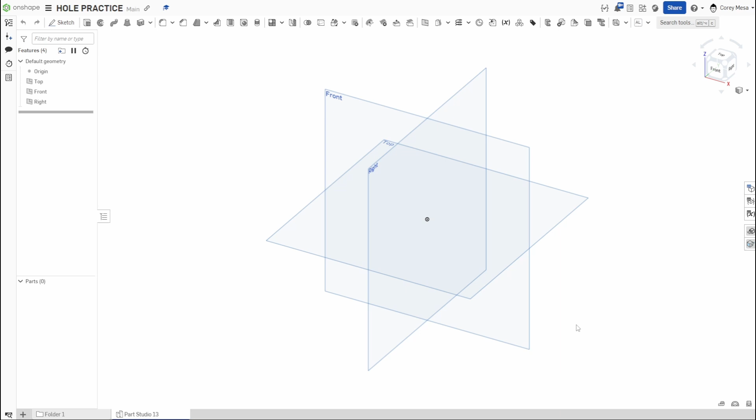Today we're going to be talking about the hole feature in Onshape. So like always, let's get started with a sketch. Let's start on that top plane, Shift S, letter N to normalize, and P to hide those planes. So for what we're going to do today, I'm just going to draw a big rectangle. Let's go like 12 by 6 off that center point on that origin.

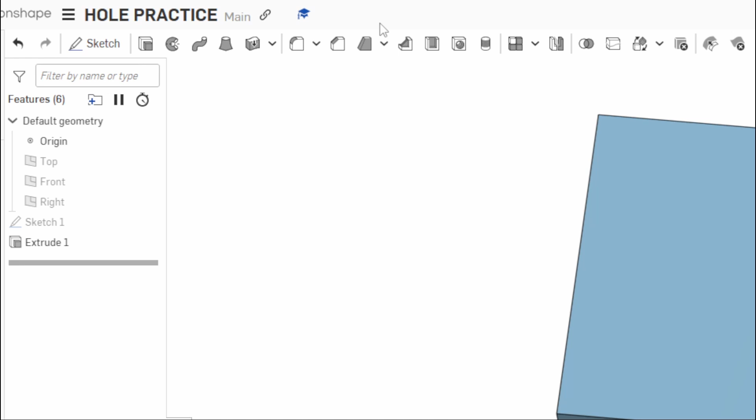Let's do an extrusion by holding Shift and E. And let's make that 4 inches thick. So we'll say okay. And now you have this rectangle. And really, it doesn't matter where or how big you're going on this for this practice. But what we're going to do is, if you follow me up top, we talked about our shell command last week. We're going to do holes this week.

Create a simple, countersink, or counterbore holes in parts by selecting sketch points or mate connectors. Specify hole size, termination type, and standard, as well as precision and tolerances for most parameters. So for what we're going to do today, we're going to show the simple, the countersink, and the counterbore. But there's a bunch of different ways you can go about making those holes.

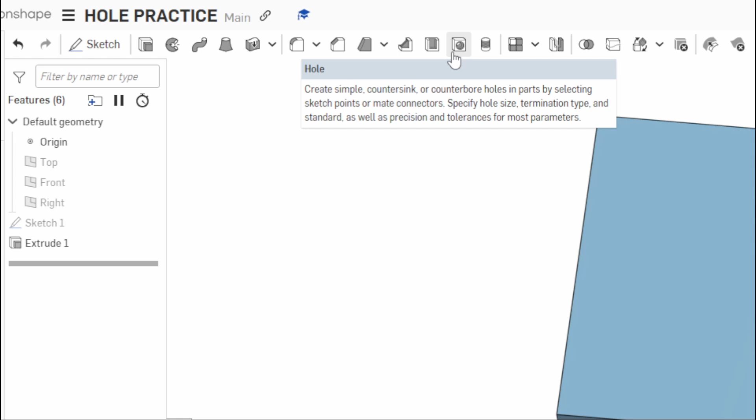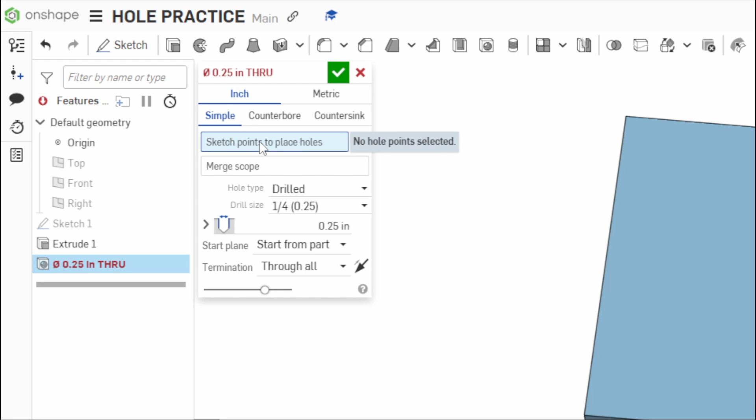So right now, the way we did this, if I click that, I have nowhere to put it. We'll start with a simple and an inch. We'll do everything in inches today. You can do metric as well, but it's asking me for sketch points to place holes. Now, I didn't draw any sketch points. I can, and I'll show you how to go back and put those points there. But for starters, the easiest way to do it is use this mate connector.

Now, when you use the mate connector feature, if you look over here, normalize that view real quick, you'll see I get all these points. So I get the 3 points on the left, 3 points on the right, and 3 points in the center, top, middle, and bottom. Right now, I could put a hole here on all these extra corners. That's not going to work too well for me because I'm only going to get a partial of that hole. So we're going to pick our origin right now.

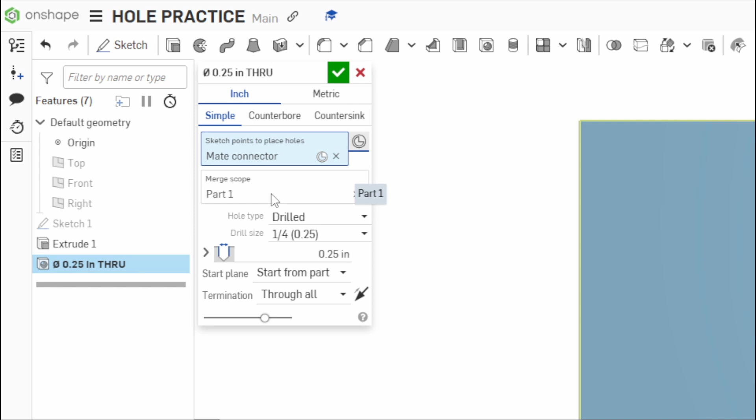It's asking me, the next thing is merge scope. So yeah, we're going to merge with part 1 because that's the only thing we have. Now it's going to ask hole type: drilled, clearance, tapped, or PEM. We'll go through that. For what we're going to do right now, it's just going to be a drilled hole, drill size. And you can go through all of these different ones, and what's cool is they added the letters with the

decimal equivalent. So I know a lot of times it's like, well, I know 1/4 inch is 0.25, but if you look, letter E is also 0.25. And if you're running off of those drill bit sets, you're able to match this here. If you didn't know what you were looking for, you can also just type in 0.25 and it'll bring up some options. Maybe you wanted to get a little more precise, letter F with 0.257, a bunch of different ways you can do this.

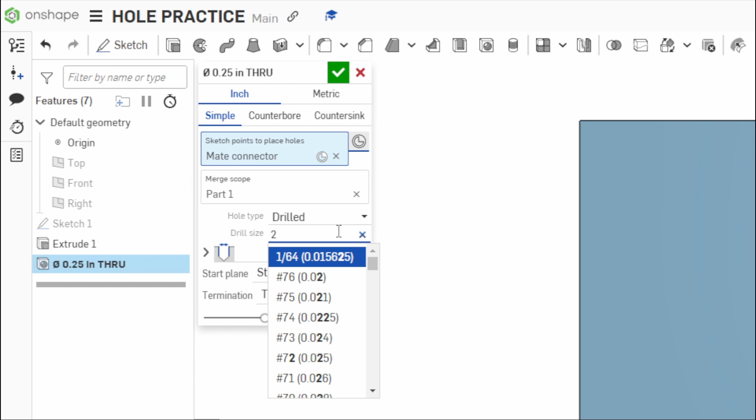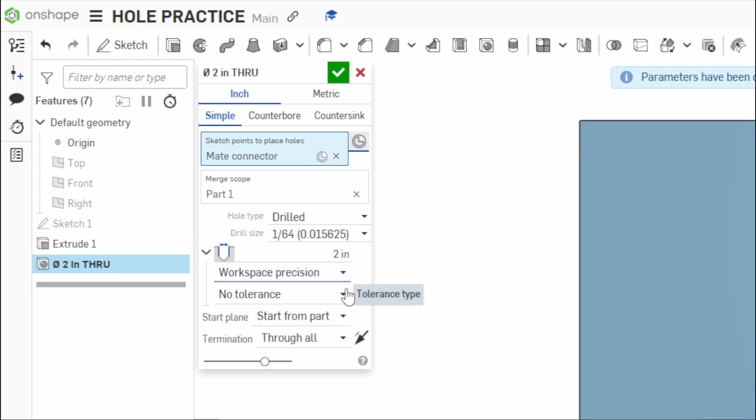But for what we're going to do, let's just make it like a 2-inch hole so we can kind of see what we're doing. So we'll say 2. Didn't like that. So we'll go down here. If it didn't pick it in the drill size, you can just write 2 in your size here. Notice the diameter tolerance. If you click that drop down, you have some other stuff. So you can add some tolerances, some precision. There's a lot of stuff you can do in here. But essentially, we're just going to drill a 2-inch hole, so it's pretty easy.

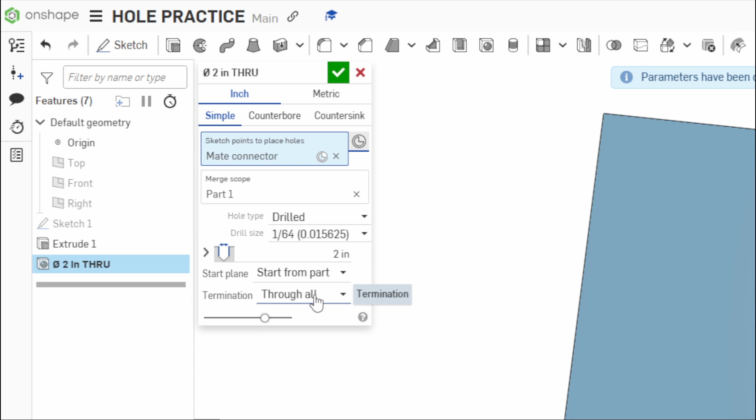And you have these: start plane, start from part, start from sketch plane, start from selected plane. Really, we're always going to start from the part on this one. And termination, this is what I kind of want to show you. So termination through all, it's going to go through that whole part. That's really cool if you're ever going to change the thickness of this. Blind, I can say I need this hole to go down 1 inch, and it'll terminate 1 inch down.

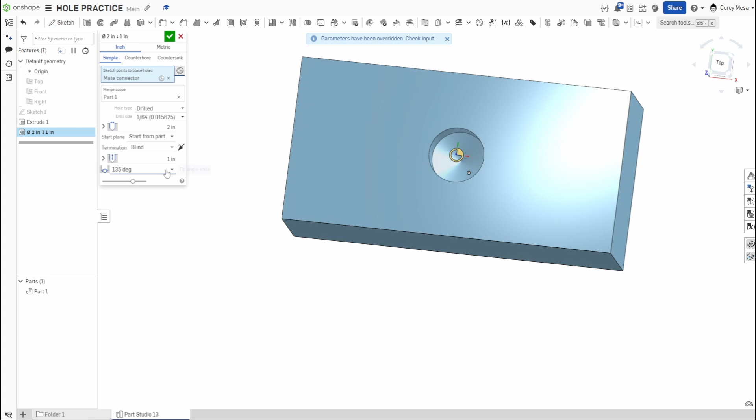I can also give it, since it's being drilled, that drill bit tip. So depending on, I can have it be a flat hole. I can do some sort of custom angle. Maybe it's a 135, a 118, whatever you're running, you can do this. Let me pull this into a section view so we can see this from the side. Turn that section view on.

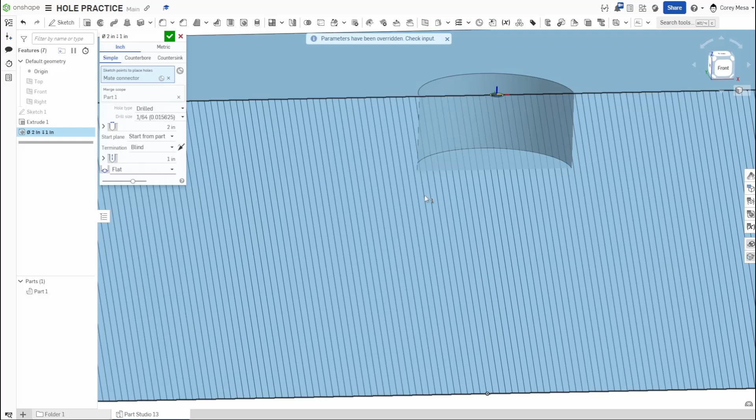There we go. So if we see this view, I can change that to a flat, and now it's going to be a flat hole, 1 inch down. I can do a 135. So depending on whatever drill bit you're using, that's how you would go about doing that. So that is a simple hole on the inch side.

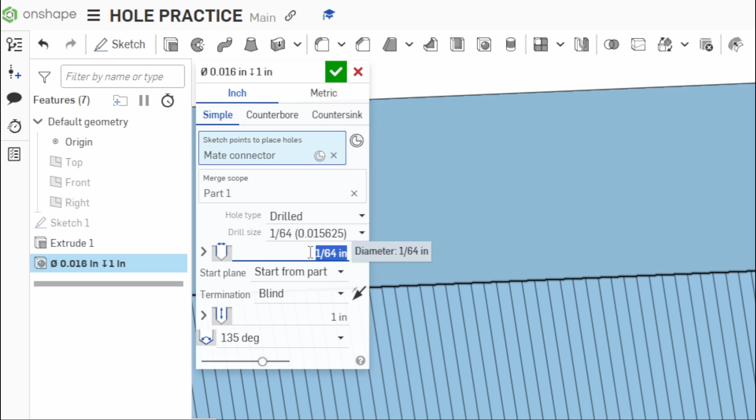I could do the same exact thing and just switch it to metric, pick a different size. Essentially, it's the same workflow. So if you're trying to do inches or metric, just pick which one you're doing. I'm going to stick with inches for this video. We'll go ahead and make this back to 2 inches. We'll say okay. If we go through all, I want you guys to see that. That's what that looks like.

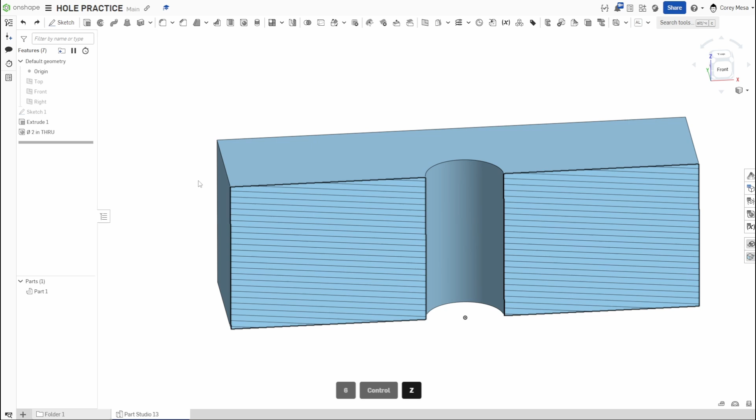So if I were to go back to my extrusion and then change this to a 6-inch thickness, that is still all the way through. Whereas if I change my hole here and I don't have it as a through all and I change my thickness to 6, you'll see that hole stays the same thickness. So if you want that hole to be drilled all the way through, kind of think about how you're planning out your holes.

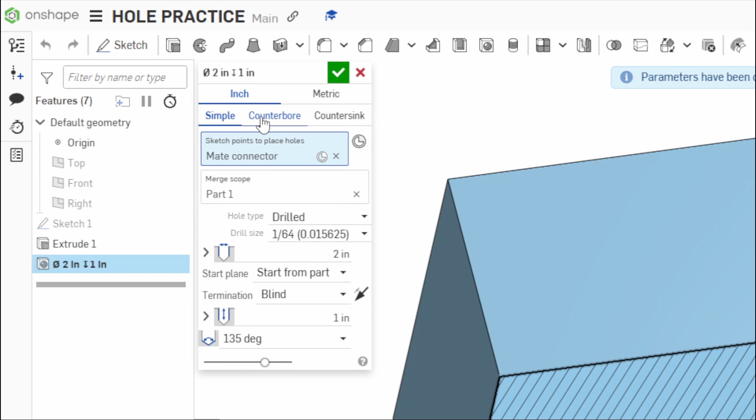I'm going to go back in there, and instead of being a simple hole, let's switch over to the counterbore feature. Now, a lot more stuff going on here. We can still have a 2-inch wide hole. You can do clearance, you can do tapped, you can do all kinds of stuff. So we'll do clearance hole, 2 inches across. However, down here, if you look, it's giving me a red issue because my counterbore,

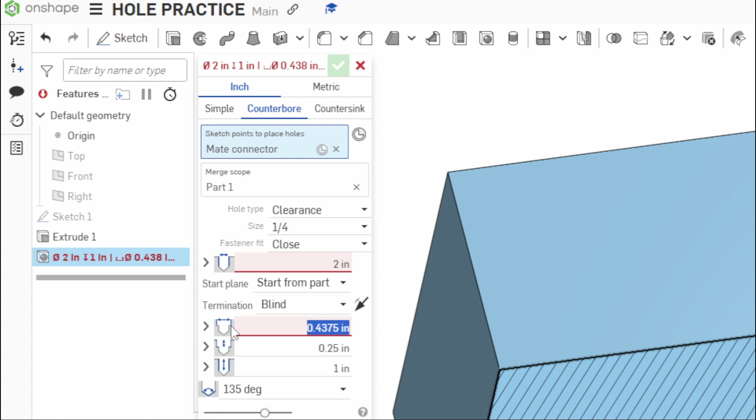and essentially a counterbore is a stepped hole, it's showing that my bigger step is smaller than my shorter step. So we need to swap these. So let's make this a counterbore of 4 with a 2-inch through hole. We'll do here 2-inch through all. You'll see how that does that there.

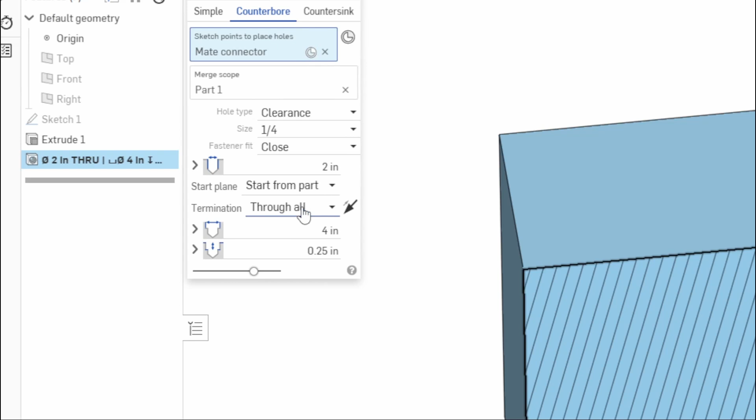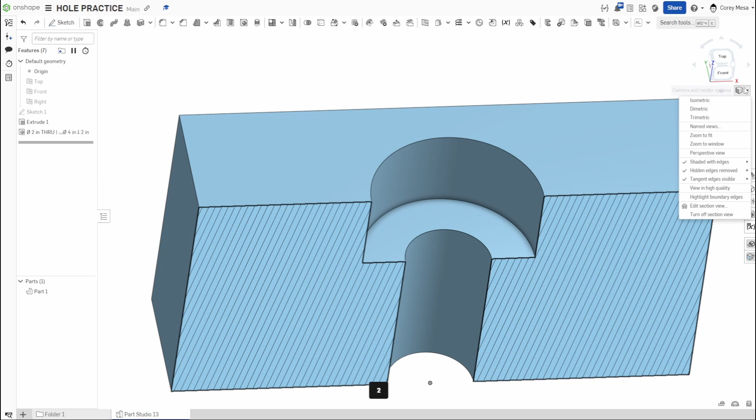And my counter bore is 4 inches, but that only goes down. Right now it's set at 1/4 inch, but if we change that to, let's normalize this view really quick, let's change that to a 2-inch step. You can see you'll end up with something like this. And if I turn my section view back on or turn it off, you'll see that it's stepped down as needed.

So why would I use this? If I'm trying to hide a bolt head and I don't want the head to be sheared off, I need that depth, but I don't want the head sticking up past whatever I'm doing for whatever reason. Maybe it's some fine machine parts that need to go together.

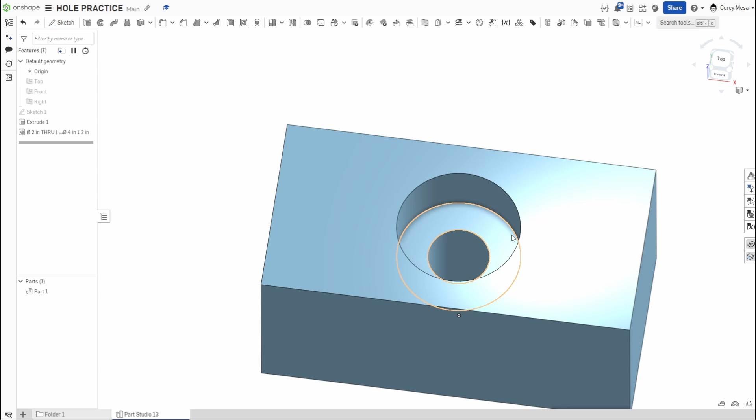Maybe it's just to keep kids from messing with screws that are sitting there, or it's just something that doesn't need to be seen, or it's something that you don't want customers to mess with a setting. And so you might put a screw or a bolt in there and then change that after the fact. So that's how you do a counter bore hole. Again, it's going to be the same thing, inch versus metric.

Now what we want to do is countersink. So if I keep the same mate connector, notice I haven't changed that throughout. I'll show you that here in a second. But if I click my countersink, you'll see it's going to turn red. We'll do a 1-inch through. We'll do a 2-inch on the outside.

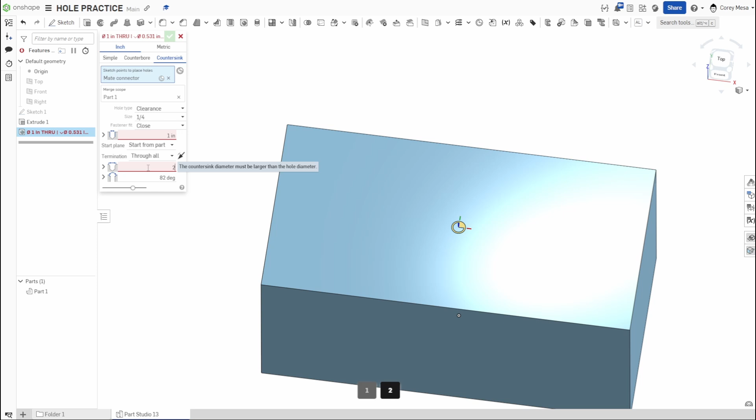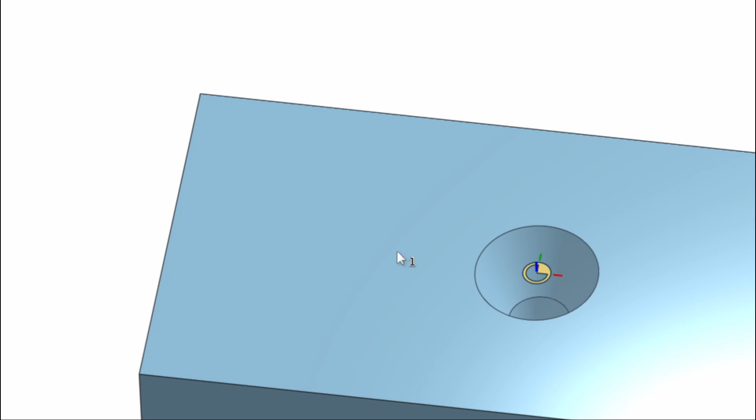And remember, if you look at the pictures, it kind of helps. So this is showing the hole that's going to go all the way through, and this is showing what that countersink is going to be. And then it's allowing me to put an angle in there. So maybe I want this to be a 45-degree angle. So if we look over here, that's that countersunk hole. It's going to be 1 inch all the way through, but at that countersink head, it's going to be 2 inches.

Let me turn that section view off again. Section view back on, so we can see what we're doing, and we can see how that angle gets affected. So we'll go there, turn that back on. There we go. You can change the depth of that. 45 degrees maybe is a little steep. And again, you can use your scroll wheel to manipulate that.

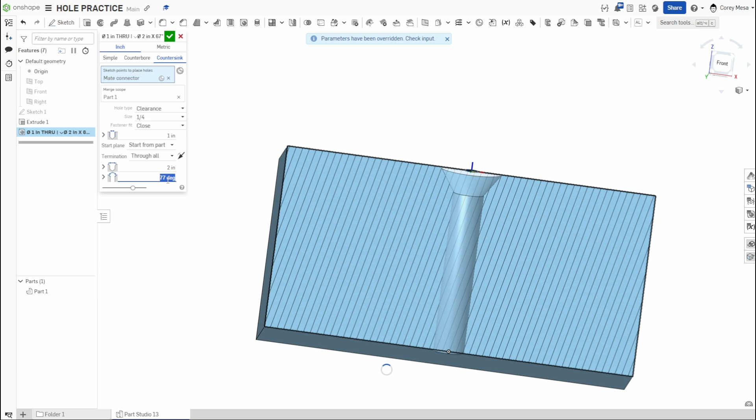So maybe it's only a 15-degree countersink. Or 15 is a lot. Maybe it's a 75-degree countersink. Not as much, right? Maybe it's 80 degrees, so it's only at a 10 degree slope essentially based off of 90. We'll see what 90 does. I don't know if it terminates or not. Yeah, it'll still give you a 90.

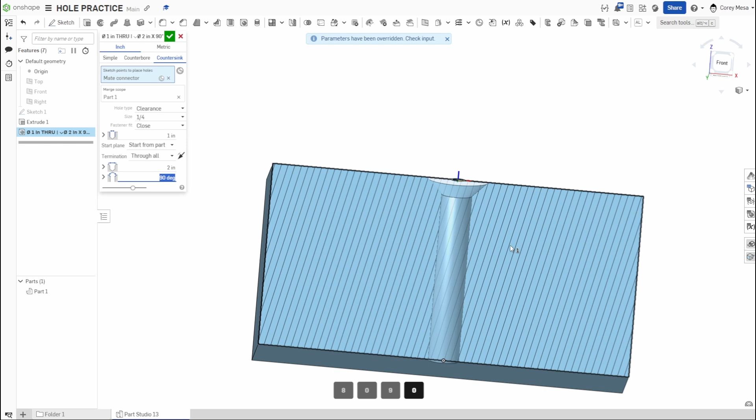120. Yeah, you can go quite a bit. I think 180 is going to be where it's going to stop you, and it'll turn red. But I can go all the way up to 179, and you'll see that's still a little bit of a countersink. Not much, but it's still mathematically possible. I can't go flat though, so anything from 180. See if it'll go down to 1 degree, 0 degrees. Yeah, so 1 to 179 is what the countersink will allow you to do.

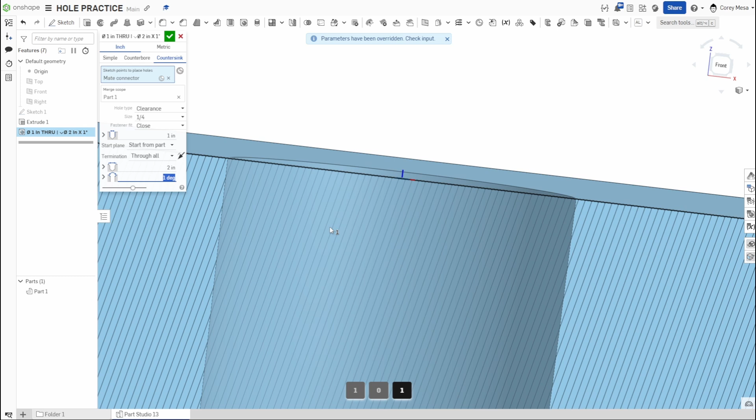I've never seen anywhere where you'd want a countersink that big, but it's possible. Just goes to show that if you're teaching drafting or you're learning drafting, there's some things you can draw in your drafting program, in Onshape, SolidWorks, whatever you're learning, that you can't necessarily create in the real world.

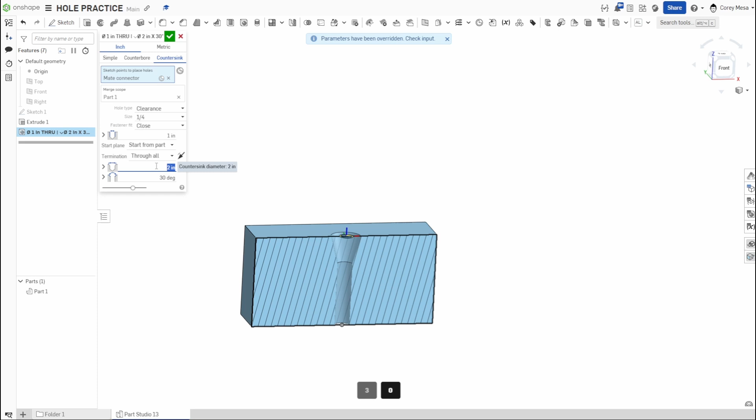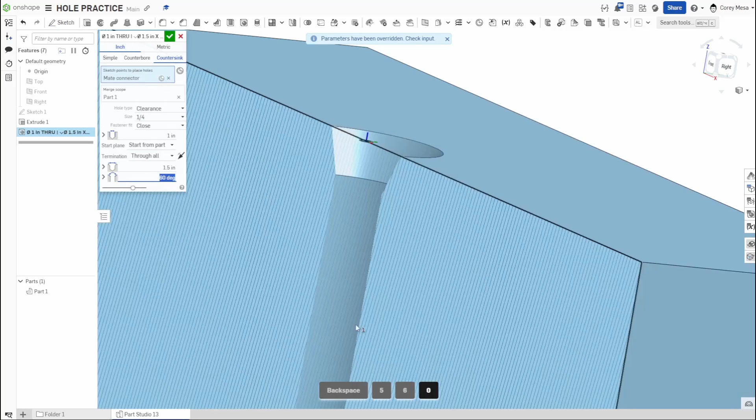So let's make this, we'll do a 30 degree, and we'll make it 1.25, a little more realistic maybe. You'll see that's where the head of that bolt can go. Let's go 1.5. I like that better. And we'll make it like 60 degrees maybe. Yeah, there we go. That looks a little more realistic. Now I have a place for the head of that bolt to sit. So that's how the hole feature works.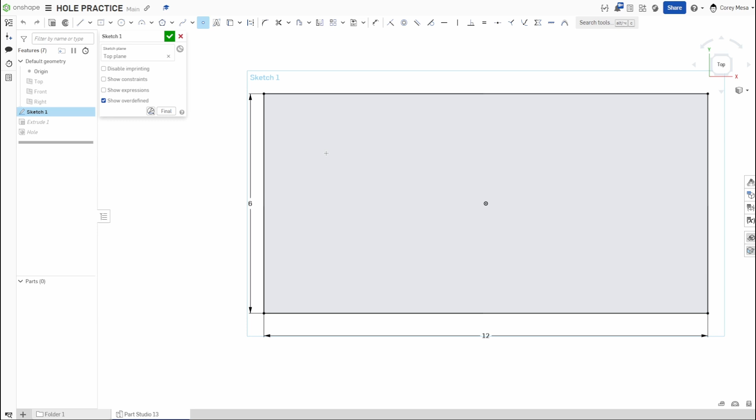I'm going to go ahead and shut off that section view one more time so you can see how we do this. So I want to do multiple holes, and this is where the beauty of the hole feature comes into play. I'm going to go back to my sketch, and I'm going to put some points, maybe here, just kind of random spots. I could also do a rectangle again, and that'll give me 4 points at a time. So that's kind of cool. We'll do that, and we'll say okay. We'll fix my extrusion to where it picks everything again.

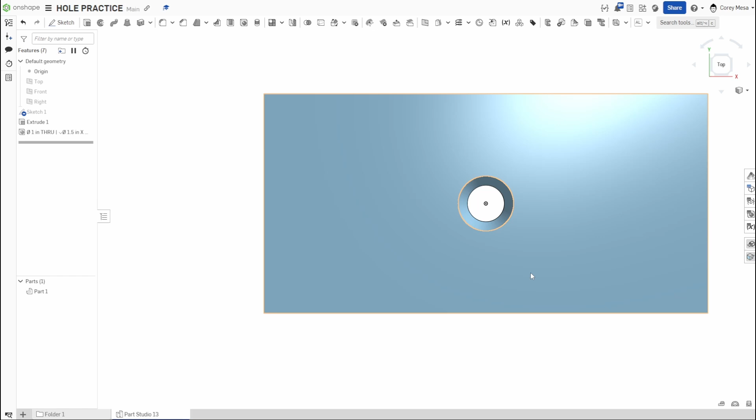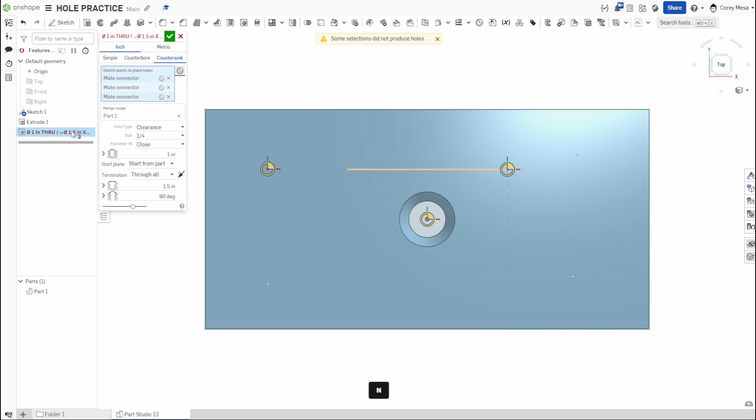And now I still have that hole feature, but now if I click back on my mate connector, and it's asking me what else I want, I can click this mate connector button again, but we'll turn our sketch on this time. And now if we look at it from that top view, anywhere I have those points I can now use as a place to produce holes. Let me fix this real quick. So yeah, I can pick that dot, put one there, put one there, put one there. I could put one if I added those points for the midpoint.

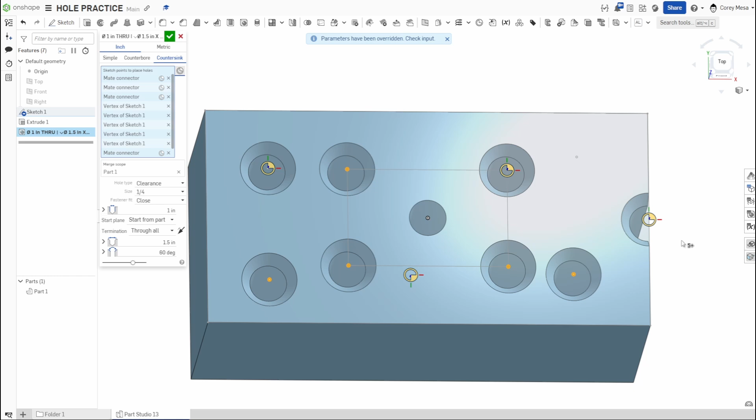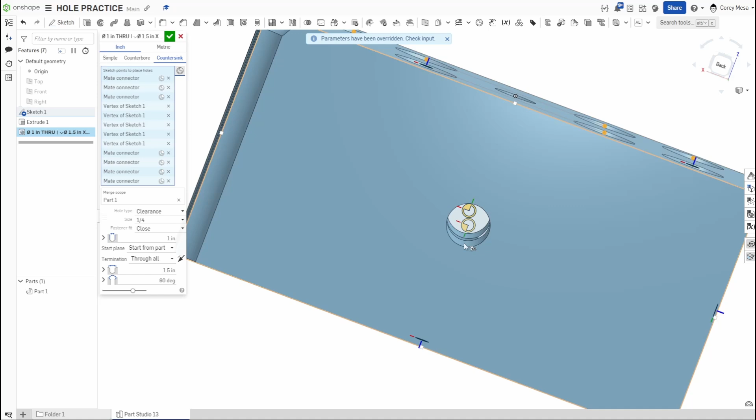I'll show you what happens if I pick mate connector and I use that piece there. Again, it's going to give me a partial hole. If I were to do this on this corner here, it's going to give me a corner of that. What's cool though is if I flip this thing over, maybe I want a hole right here. I'm able to do that and have those holes meet. I can do it through all four sides. Let's go to this other side. You'll see they are meeting together. So if I have multiple holes, all the same type, same size, that's how I would go about doing that.

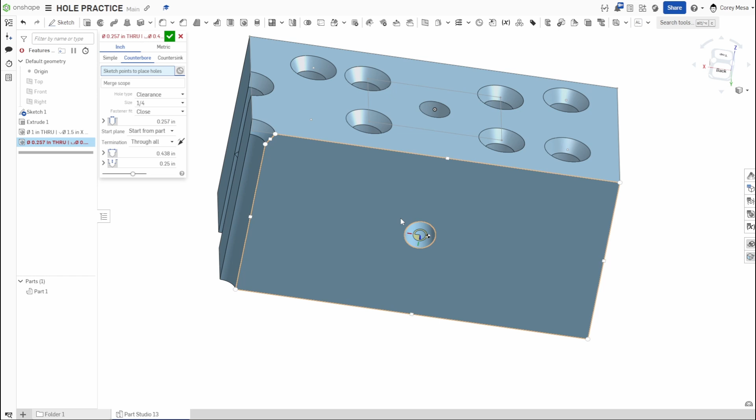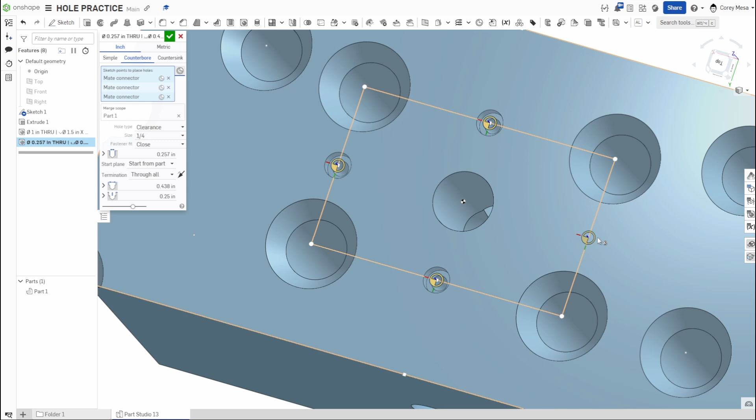Maybe I need, let's do the hole wizard again, but this time I need a counterbore hole. And I want that to be based off of this midpoint right here. There we go. Now I have some counterbores in between all of these parts based off of that initial rectangle. So I can make some pretty cool 3D geometry with very little 2D sketching involved. Literally just drew two rectangles, added some points, and called it a day. And now I'm to a block.

It looks like a block of Swiss cheese, but it's something I can do with multiple types of parts. And that hole wizard is very, very intuitive. I feel like it gets better and better. When I first used it, it was kind of clunky, and it would take a little while to develop these holes, but it loads fairly quickly, and it works really well.